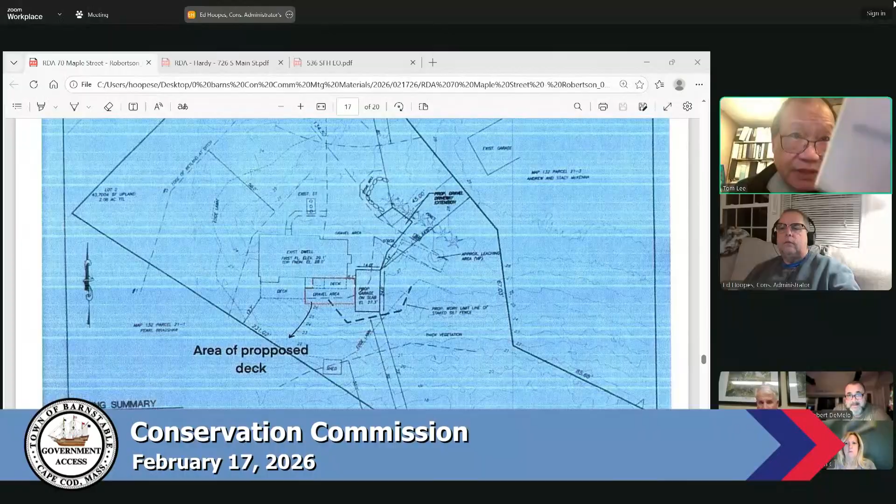I have to recognize Jeff first. Jeff? Conflicted on this application, Thomas. So Jeff is recusing himself from these applications. John? John McLaughlin from Groundworks.

Anyone representing the second RDA, for Donna Hardy? Ed, you don't see them, right? I'm going through again. I don't see anybody. Is there anybody here for Donna Hardy, 726 South Main Street? Hi, this is Masood with Groundworks. Carlos and I are here.

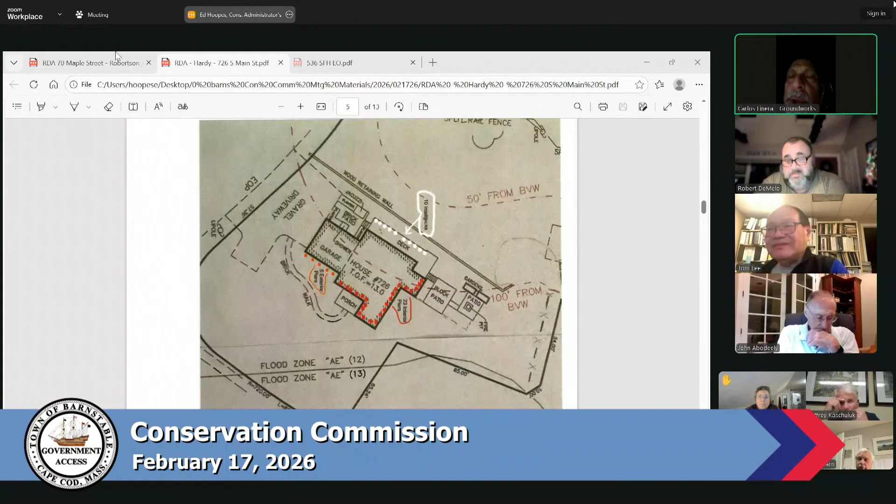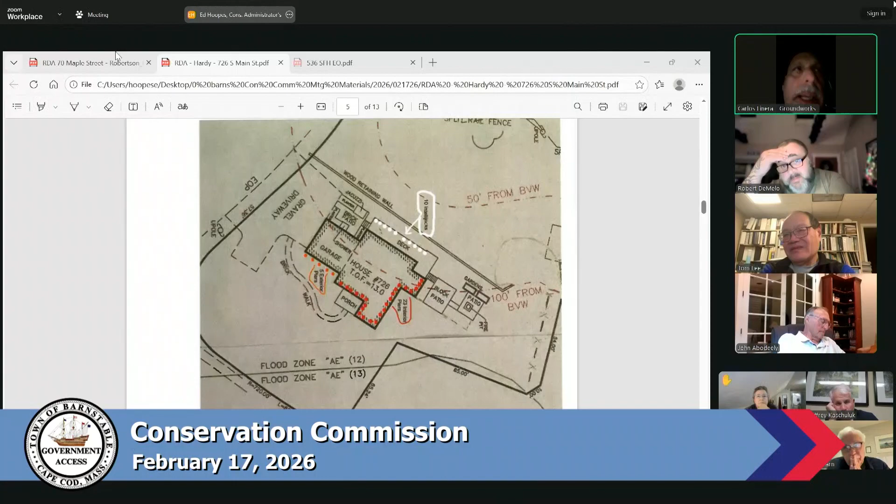Okay, but I do understand what you're saying, and honestly, at the end of the day, I feel terrible for the homeowner. Oh, so do I, it's horrible. This is a multi-million-dollar home, and we're providing her with a solution that we are standing behind 100%, not only because we've been doing it for decades, but because we strongly believe that it is a permanent solution. We have our engineering team that reviewed the whole project, we have one of the engineers here with us, and we strongly believe that this will solve their issue. This is not going to settle any further.

If this is what you guys do for a living, then by all means—I don't do this for a living, it's just that I've done similar projects, but I've always known the history. So yeah, just a little bit of info.

Yeah, just to add on, to address perhaps Rob's comment here: these IntelliJacks that were designed here, we actually have a load analysis calculation that goes along with this, which will break down how this load, all the weight above it, is transferred into these jacks down to the footing, assuming the worst case scenario for soil conditions, which is 1500 PSF. And so all of those calculations will be provided along with this.

Yeah, I'm fine with this. Don't forget, this is under the conservation's jurisdiction. We can only look at the impact, whether environmentally there is any problem or concern with it. Structurally, it's all up to the engineer to design the support structure to support this.

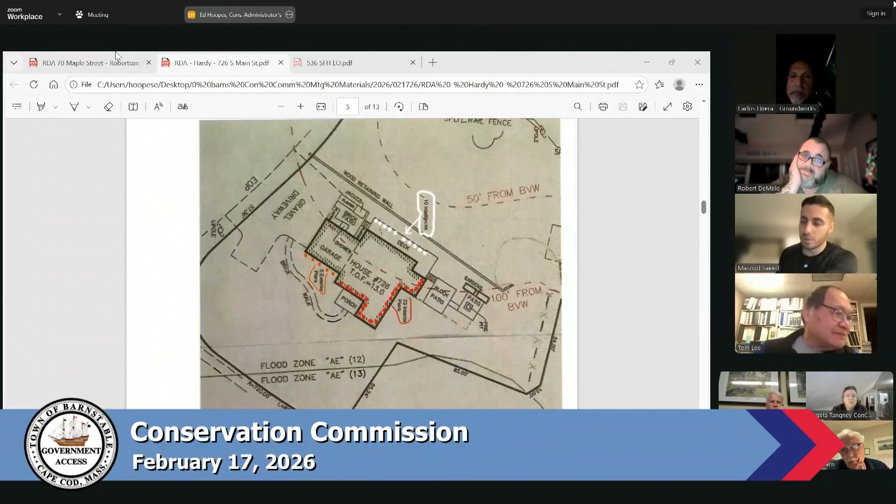But Angela, just a quick question. In the resource area off the deck side, there's a wood retaining wall. Could you at least tell us what condition it's in and how tall it is? And will this affect it, putting any pressure on that? Because that directly affects the resource area.

I apologize, what wood structure are you talking about? I'm not familiar with a retention wall. On the plan, there's a wood retaining wall, I believe, that goes across the back side where the deck is, where you're planning on putting the deck system. Do you know how tall it is and what condition it's in? The answer is I don't know.

Okay, and I'm being honest with you. I walked the entire perimeter of the property, and I went underneath the deck. I went in the crawl space. I did it all. I don't remember seeing a retention wall. I know that the property, after the deck ends, you have about 4 feet of flat area before the land goes down quite a bit into like a culvert or something.

Right, that's our resource. Yes, that's what we're trying to protect. So I want to make sure you were aware of that wood retaining wall that you are now going to put pressure on, that's all. No, I'm not against this RDA, but there are things here I think we need to consider as you work through this project. Thank you.

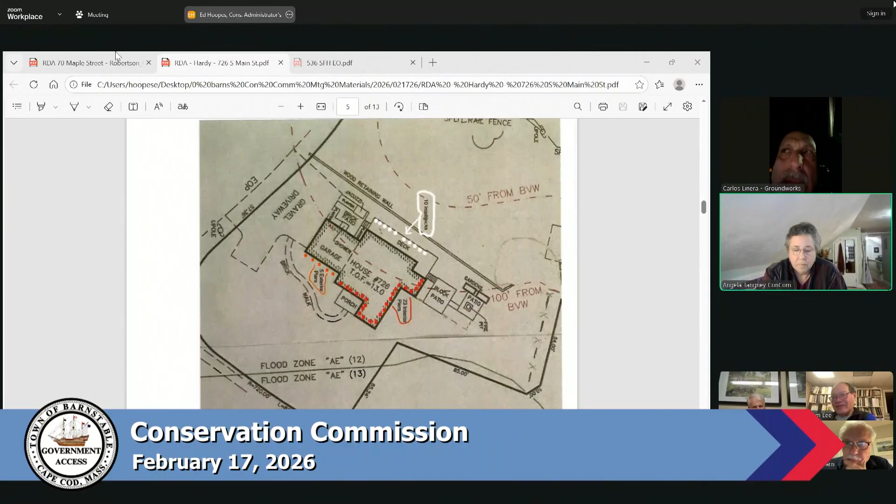We're going about 3 feet from the end of the deck inwards. That's where the main beam that supports the structure sits on 6 sonotubes. So we're going to put the jacks on that line, right where the beam for the deck is. We're not going to be doing any work beyond the deck itself. And that still gives us 4 or 5 feet before this retention wall that you're talking about, which I probably didn't see, ma'am, because of the snow.

Yeah, I understand, thank you. Okay, Chenoweth, any public comment on this one?

Seeing none, could I have a motion to approve this project as a negative determination? So moved. Second. Roll call. Abodeely, aye. DeMelo, aye. Hearn, aye. Lee, aye. Kaschuluk, aye. Sorry, Jeff recused himself. I'm sorry, my bad. Sampu, aye. And Tangney, aye. That's 6 of us, that's unanimous.

Thank you. Thank you, good luck. Thank you, guys, I appreciate it. Appreciate it, have a good one. Thank you, Masood, take care.

Yeah, bye-bye, see you later. See you, bye. Is there anyone representing the first one, Pamela Robertson, here? None? Let me go to the NOI and they will come back.

We have 2 NOIs this evening. The first one is Robert J. IV and Thomas P. Remmes, removal of a brick patio, paver patio, installation of a permeable paver patio and fire pit within 50 feet buffer at 536 Shootflying Hill Road, Centerville, as shown on the Assessor's Map 193, parcel 029. And Michael from Allen and Major Associates.

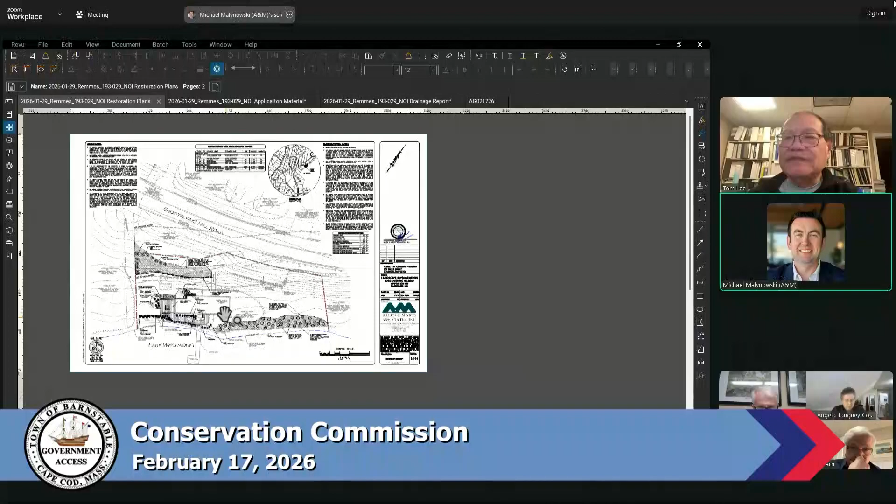As the NOI states, this is for the installation after the fact of a permeable brick paver patio for the existing house located at 536 Shootflying Hill Road. You can see the new paver installation here with the front door. As part of that installation, there was some additional landscaping installed in this location and along the existing retaining wall that sits along the lake's edge. As part of the mitigation, there was approximately 443 square feet of patio area that was constructed.

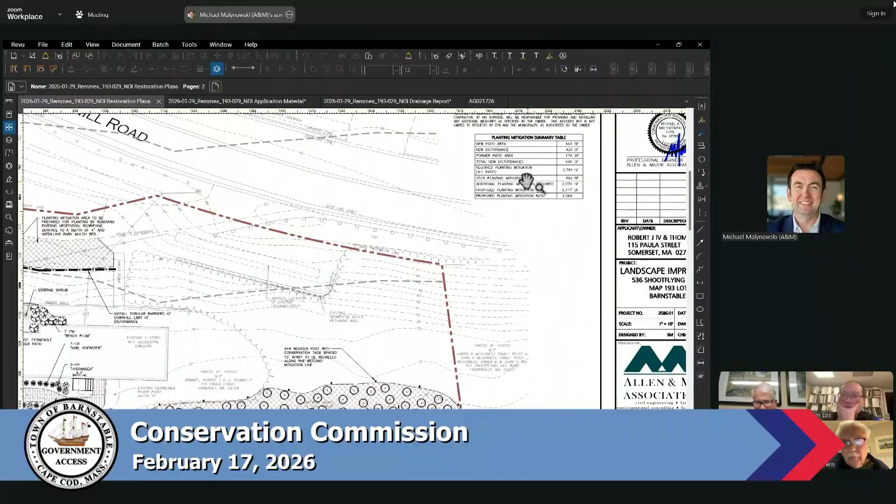There was 421 square feet of disturbance associated with that. We removed the existing 174 square feet of patios, which left 690 square feet of disturbance. Based on the town of Barnstable's requirement of a 4-to-1 mitigation ratio, this resulted in requiring 2,761 square feet of new planting. As part of the work done in the spring of 2025, there was 691 square feet of mitigation proposed.

And as part of this latest package is an additional 2,117 square feet of replication that is being provided.

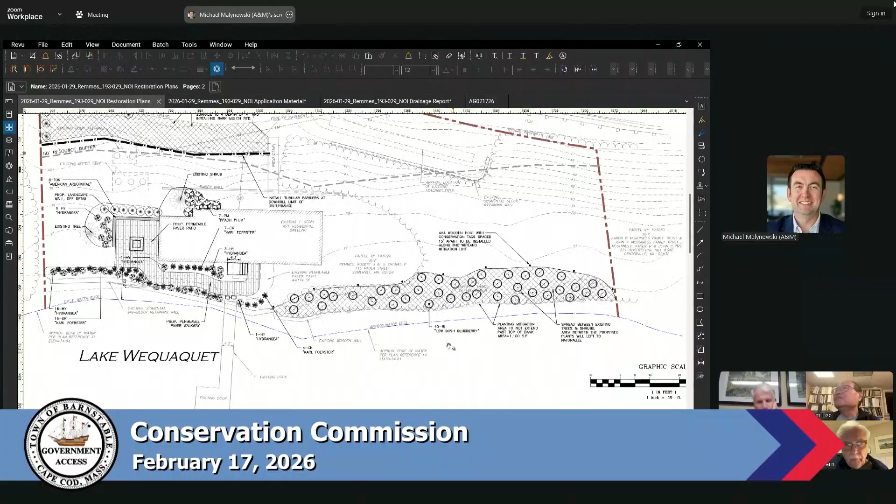The primary area of the replication is the installation of 40 low bush blueberries situated in this area. It's sort of natural scrub vegetation in that area, so the installation of the low bush will pose minimal impacts to the buffer. To supplement that, there is a large area being proposed to be replicated with hay-scented ferns along with arborvitaes in this area. Between those areas, we exceed the 4-to-1 ratio for the disturbance with the proposed paver installation.

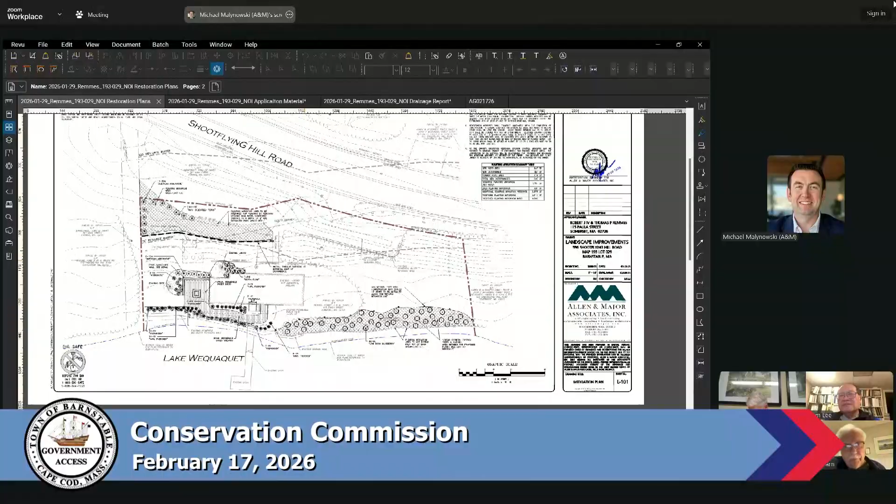This is the mitigation plan, and we had specific details that outlined the erosion control measures that were installed, the permeable paver construction, as well as the landscape wall and fire pit that was installed in that area.

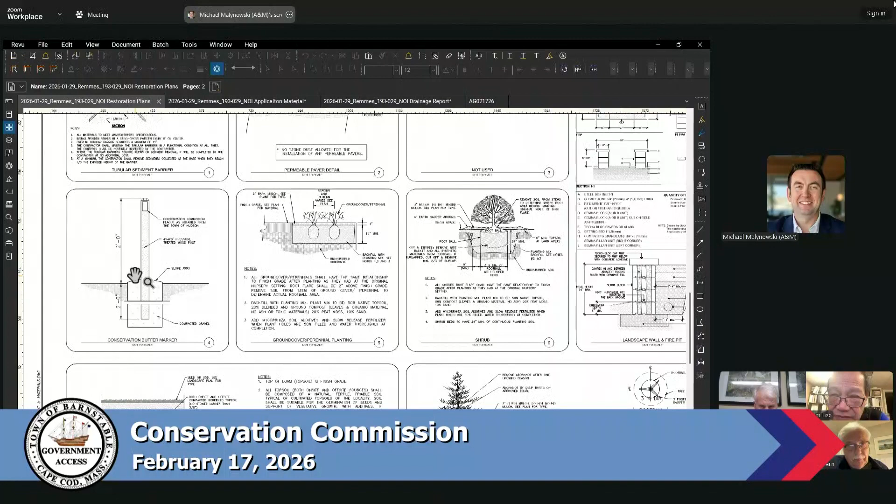As part of where the low bush blueberries are, we are providing the conservation buffer markers that the town has as one of their options. It's a 4x4 post with a conservation tag on it.

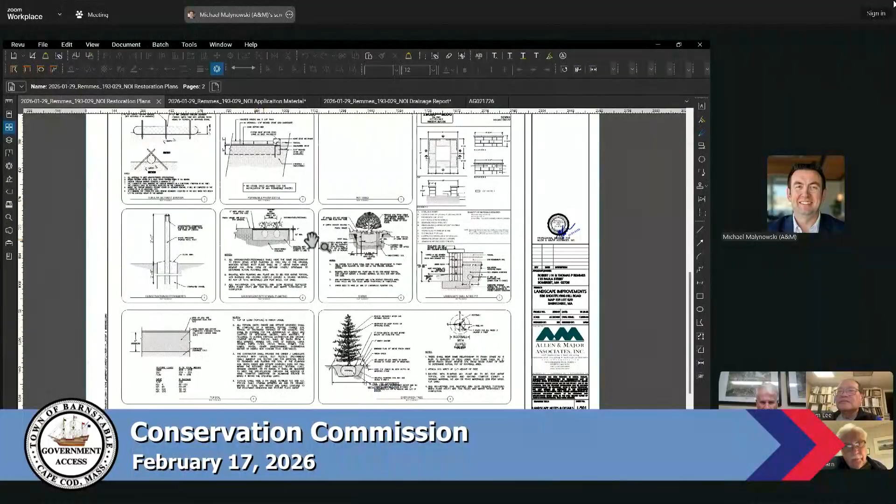We did provide, as part of the NOI package, a stormwater report, and based on the installation of the permeable pavers, we do have a net decrease in stormwater, both rate and volume, providing infiltration of stormwater in the area. Be happy to answer any questions that the commission may have.

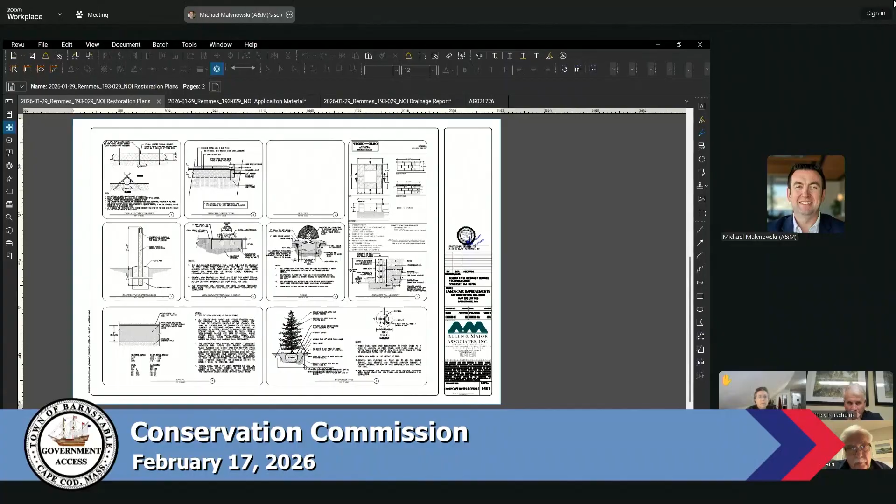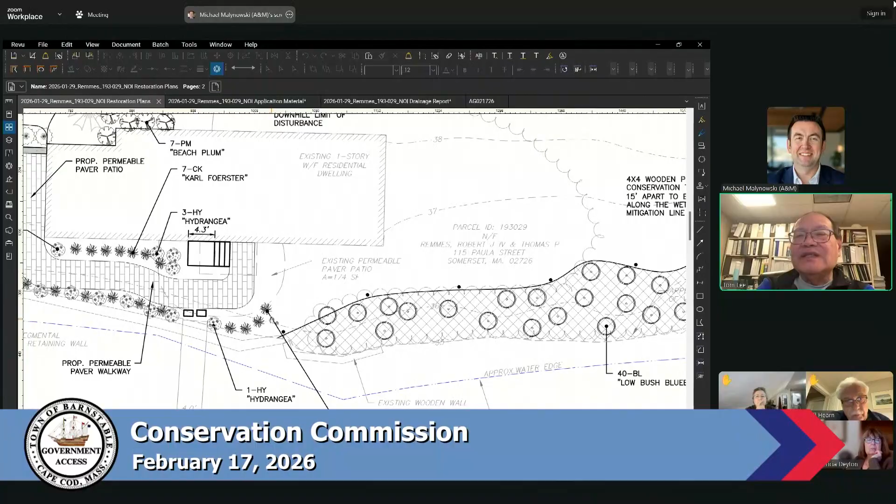First of all, can you go back to the engineering plan that you have. Yes, sir. I need some dimensions on the existing paver patio area. So the existing paver was 174 square feet. It's not just the square feet, I need the width and the length and all that stuff. Oh, okay, total area, I need dimensions.

Let's see, so you can submit a revised plan, I just want to mention it. Oh, okay, that we can do. Before I go to the commissioner, Ed, did you get a chance to look at the planting and the mitigation requirement?

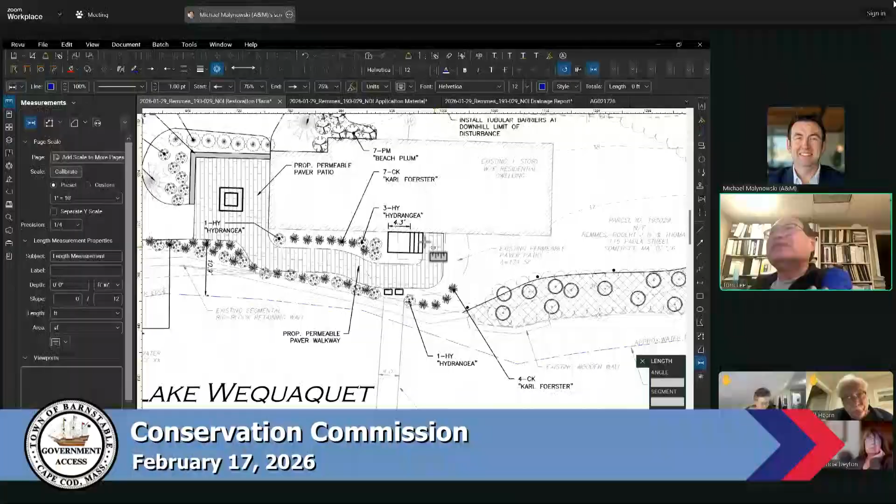Yeah, so I've got a few problems with the plan here. First of all, looking at the species and types of plants, most of these are not considered native plantings. Hydrangea is not something we would usually put into a mitigation area. I'm not sure about the Karl Foerster grass either, I'm not familiar with that variety to begin with.

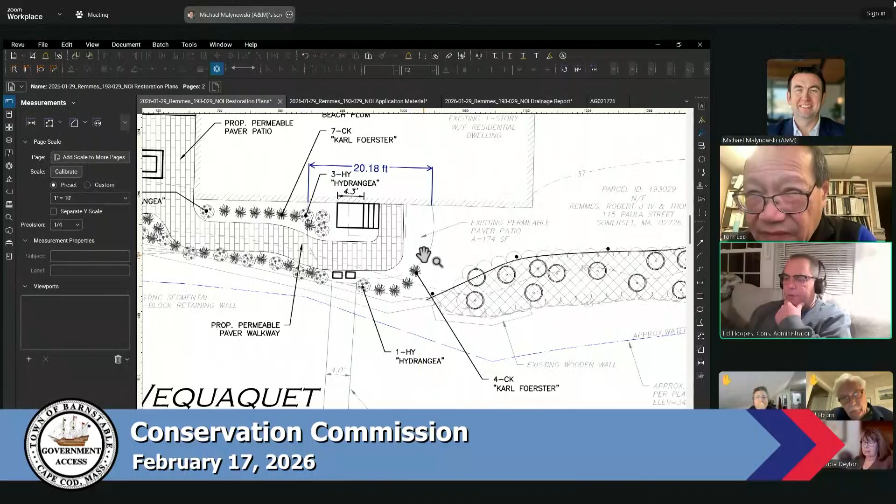I think the other issue is that whatever that northern area is in the 50 to 100 foot buffer, the hay scented fern, that might be 800 square feet, but I think that's in the wrong place. The mitigation needs to be put down in the 50 foot buffer.

I don't think a lot of what is being claimed as mitigation area for the 2025 planting mitigation is right. The area is good, I just don't think the plant variety is sufficient or of the right species and types.

The other thing is that I see a lot of spaces where the current conditions are showing a lot of mulch in those planting areas, and again, that's not something we would be looking to see. We would probably want some sort of a native seed mix interspersed throughout the rest of the plantings. I think there might be a little bit better options that you might consider for that area to the east, it's not the mitigation area that you were showing to the east of the property.

Low bush blueberry is an option you can certainly use, but I think it's being used a little overzealously, and maybe there could be some other varieties of plants mixed in there. Overall, I think a revised plan showing a much better distribution of the mitigation area is required, along with the types of mitigation planting, species, and varieties.

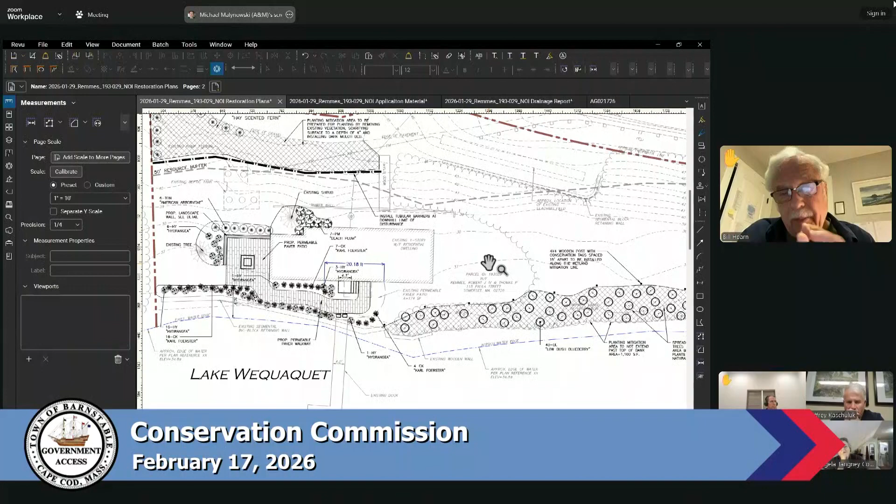I do believe that the mitigation zone on the left side of the house, to the left of the patio, I would think you'd want to stack a lot of your mitigation along the waterfront over there. Hey Bill, this is Tom Remmes.

I'm the owner of the property with my brother, Robert Remmes. I just wanted to explain some of the reasoning for the locations of the mitigation. As you're aware from being on the property this afternoon, our driveway is right at the very top of the property, and it slopes down toward the lake. The house is just under 1,000 square feet. We have minimal flat portions; everything else is kind of ramped going up.

So we were trying to do some of the mitigation from the top of the driveway to the bottom of that hill, essentially, to prevent any runoff. It would create a buffer to wash out anything coming from the driveway or from Shootflying Hill Road before it hits the lake, similar to what mitigation is supposed to do: protect the wetlands areas.

And then on the other side, as you were saying, we do have that 2-foot buffer zone where we have a couple of trees planted right on the coastline, as well as some pricker bushes and holly bushes in a strip, and then a little open yard area. We have a small retaining wall that then drastically slopes up towards Shootflying Hill Road. That section is where we have a holding tank for our septic, which with the new sewer line going in will be removed, and we're going to be tied into the gravity feed system. So that's kind of a phase 2, if need be. We were going to plant some mitigation up there as well.

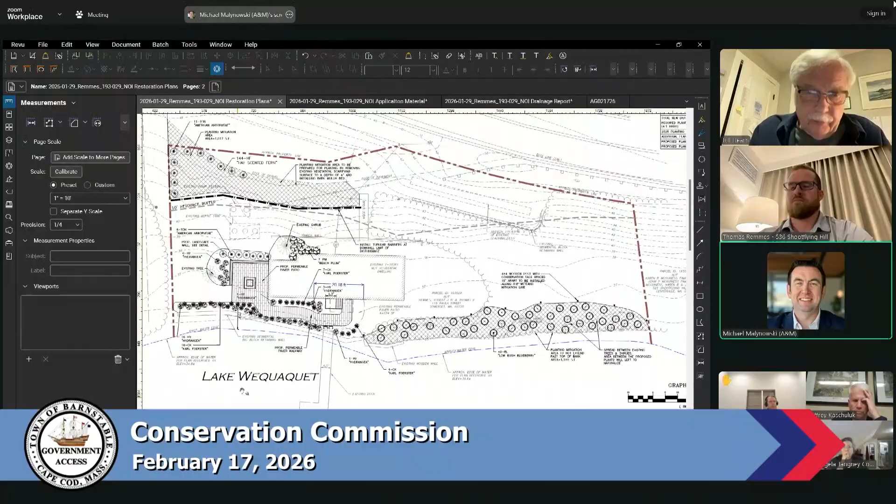To go back to your comment about the pavers - they're actually permeable, which is a better solution than flagstone. If you put in flagstone, you'd need a bedding material that makes the area impervious. The stone pavers, although they look smooth, are designed to take on much more water than a field stone or blue slate walkway. So permeable pavers are actually the preferred alternative for stormwater in this situation.

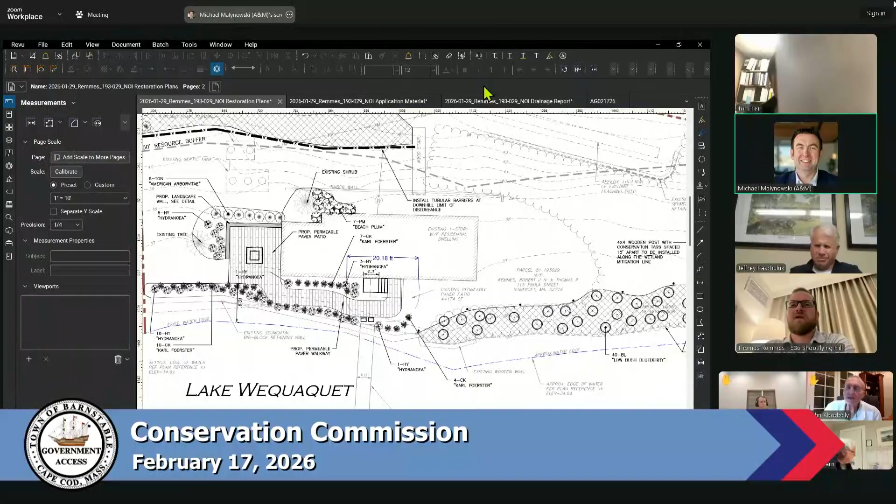How much time do you think you need? Would it be possible to get some written comments from Mr. Hoopes? From Ed? Yeah, all of these comments are great, but this is the first time we're hearing that there was concern by staff. We haven't received any written comment on the plans that were submitted, so that would be helpful if we could get that.

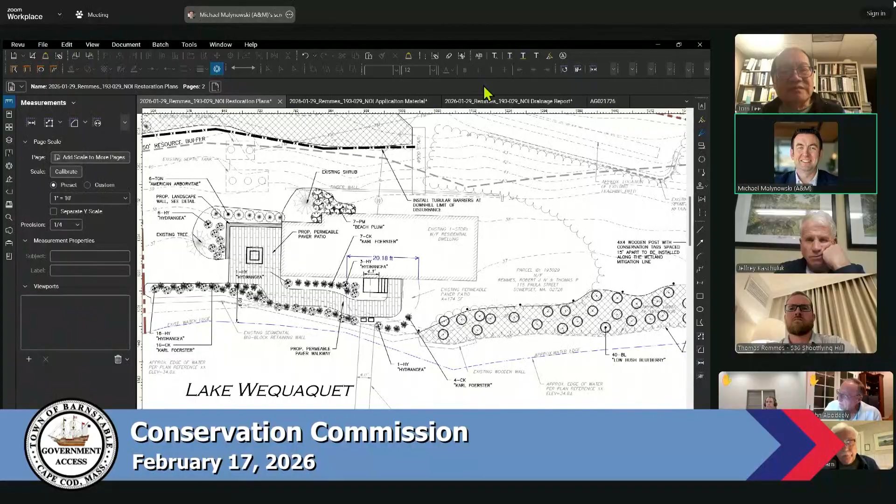Ed needs to respond to that too, Tom. Ed can send you an email, or you can talk to Ed, because right now, looking at the agenda itself, in March we have 3 hearings, the 3rd, the 17th, and the 31st. I think the 3rd is too quick. You may need more time. It may be the 17th or the 31st.

So Mike Malynowski, if you could send me an email tomorrow, I will try to spell out some of the major points that the commissioners are going to be looking for. Get back to you as quickly as I can. All right, sounds good, thank you, sir. Is March 17th enough time? I think that is doable for us. Okay, if not, you can always just let us know, and then we can move it to the 31st.

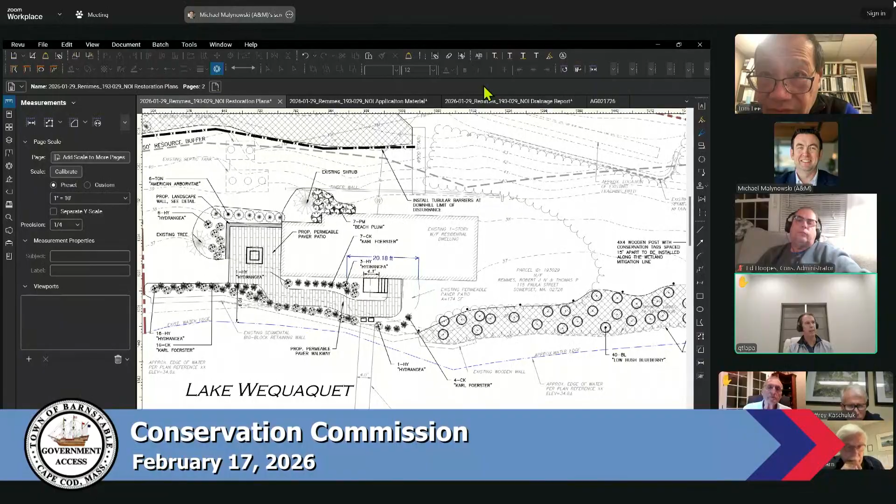Hi everyone, my name is Guy Talapa. I'm the homeowner at 547 Shootflying Hill Road. If you're looking at the plan, it's basically right to the left of the patio. Along with a few other houses, we have a right-of-way deeded path about 10 feet wide that I do not believe is really acknowledged on this plan, or maybe it is over there. Tom and Robert are great neighbors. We have really no exception to the patio. The two kind of things we are taking exception with, and I might have a third one now that I'm seeing these giant arborvitaes at the top of the screen.

The 7 or so arborvitaes that are in front of the patio, we totally get the screening intent there, you want some shelter from the road. But from our front yard, we're already seeing the tops of those, and they grow like 3 to 5 feet a year, topping out at 60 feet tall. So I feel like over time our view is going to get really obstructed. And this is the first time I'm seeing the 11 arborvitaes at the top of the driveway. If those go in with the ones down at the road, our entire view of the lake is gone. I apologize for the late notice.

I sent Kimberly an email, we got notified kind of late, I feel, on this hearing. Back to the 10-foot deeded path, the low shrubs, I think the intent of the path is to allow us access to the lake. I sent Kimberly some photos, and I think everyone's seen it, but the little band running along the left side right against the water kind of cuts across there. So it's not like we're obstructed from accessing the lake, but it feels like a bit of a land grab with the planting going over that area.

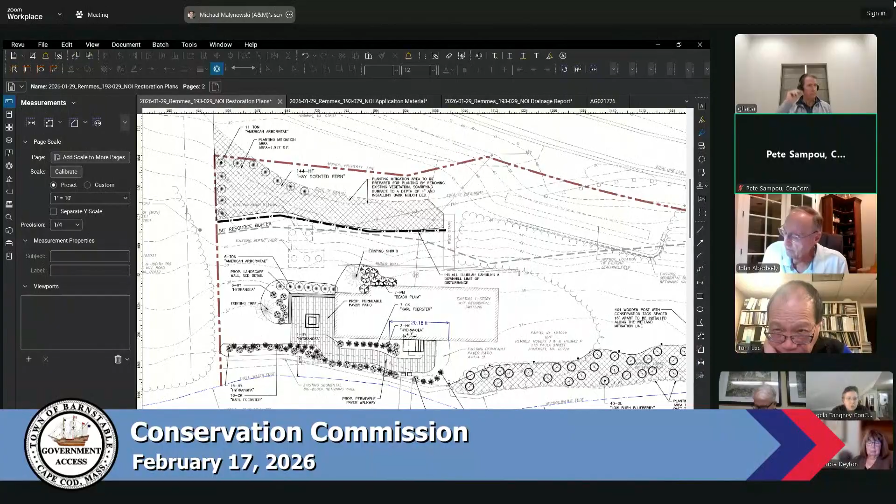Thank you. Michael, send an email to Ed so that you guys can talk about the type of mitigation planting and the location of it. We will do that, sir. Thank you, everyone.

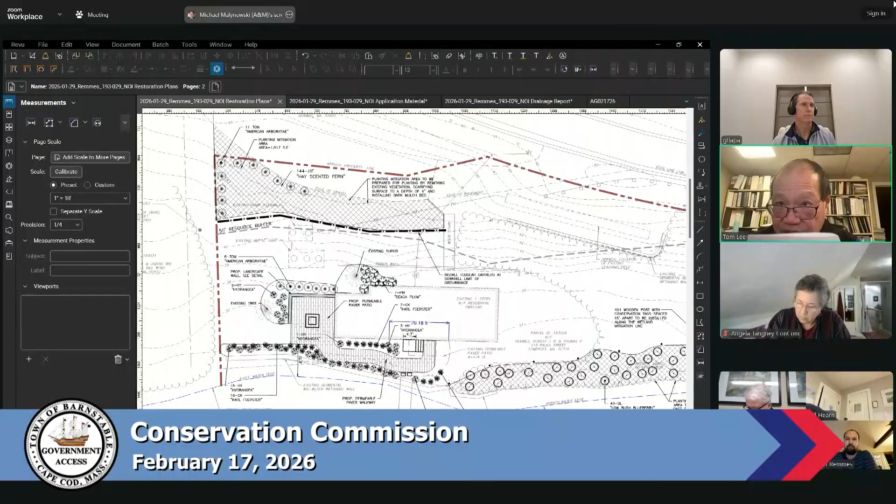Thank you. The next NOI is Gregory J. and Julianne P. Pinto, trustee, JDC Ocean Avenue Realty Trust, proposed management of invasive Phragmites at 47, 57, and 63 Ocean Avenue, Centerville, as shown on Assessors Map 226, parcels 035, 036, and 149. Good evening, John O'Day from Sullivan Engineering Consulting, representing the applicants. I will pull this plan up for you.

We have been working with the Pintos, who are the owners of 63 Ocean Avenue and the majority of the marshlands at the end of this creek off of the Centerville River. We worked with them on a bank restoration that came before the commission, and as part of that project there was a bit of Phragmites control right along the immediate bottom of their bank in these areas. They were very happy with those efforts, and they are concerned about whether the Phragmites will continue to proliferate in other areas of the marsh.

So they started this venture where they're hoping to continue to expand on the areas they're controlling. They've also been in touch with their neighbors heading south at numbers 57 and 47 Ocean Avenue, who also have smaller areas of marsh and Phragmites, but they'd like to begin working their way that way. So this has been filed as an ecological restoration. The scope of the project is strictly for Phragmites control.

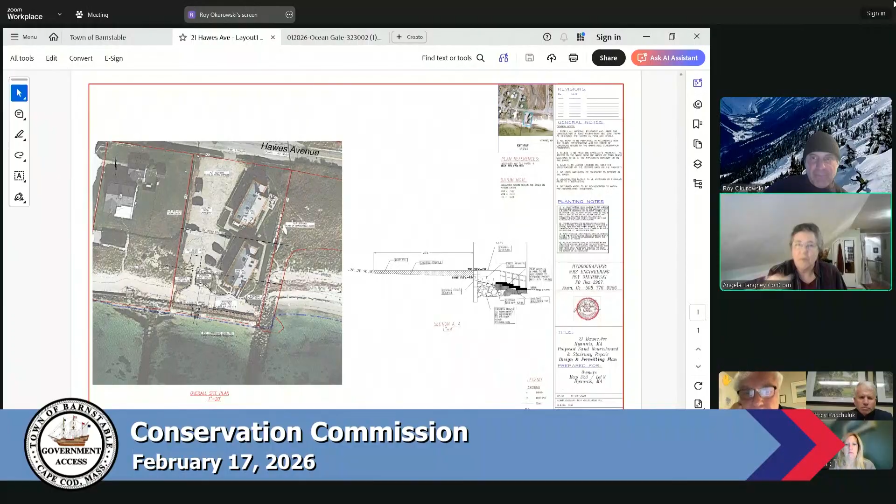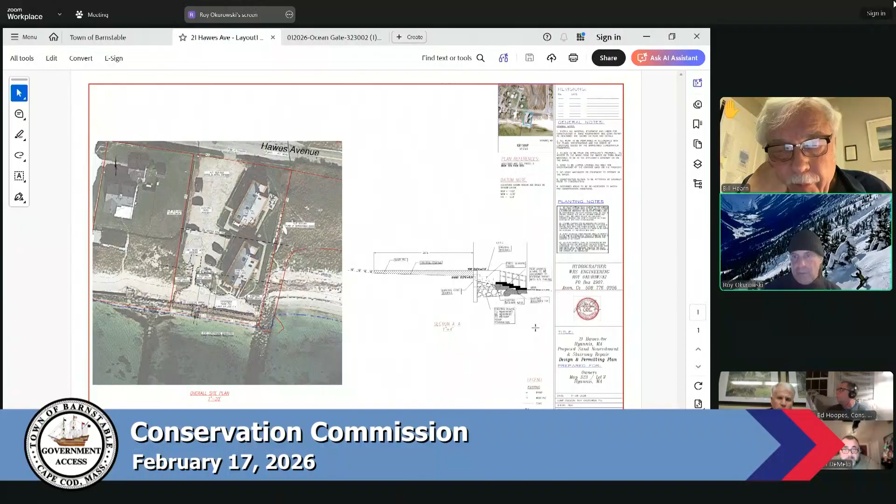Thank you, Bill. The diagram says the seawall is 5.5 feet high. Is that right? Yeah, the top of the seawall is 7. The top of the existing wall is 7. The elevation of the sand varies... get a zoom in. It says, I'll zoom in... .5 is like where a lot of the stairway comes out, and that's the low point in the sand.

So we're putting approximately 6 inches to 1.5 feet of sand in behind the wall. It seems to me like having a higher seawall would help. Have you considered that? So they didn't want to do that. When I proposed it to them, I said you can raise the wall and the groin around the whole property, and because it's in the same footprint, it's a fairly easy thing to license and permit. They didn't want to go that route at this point. Cost prohibitive, and plus that seawall on the side is on town property, not theirs.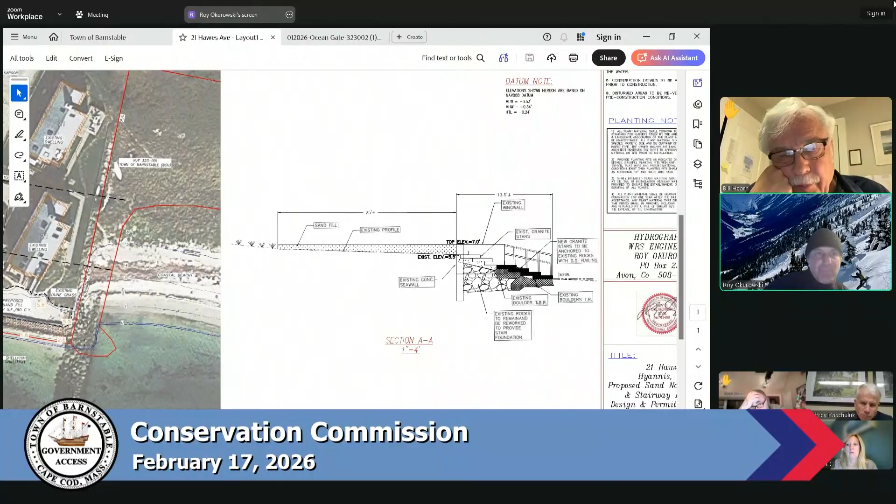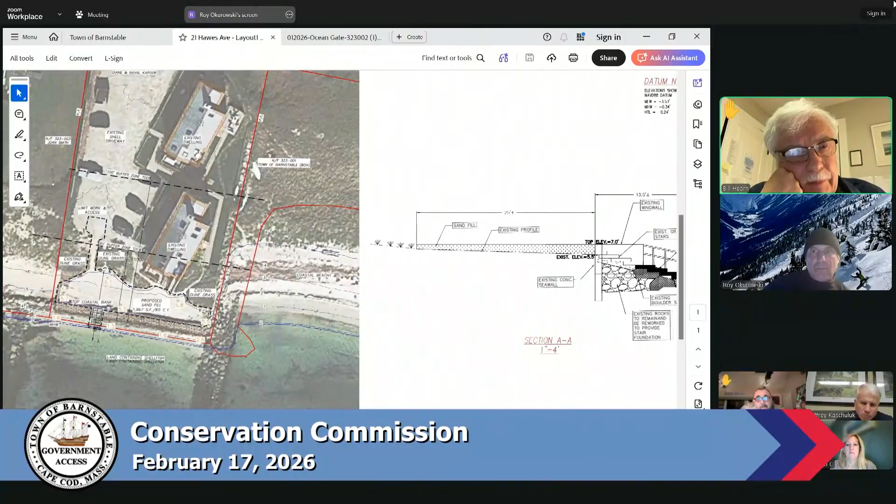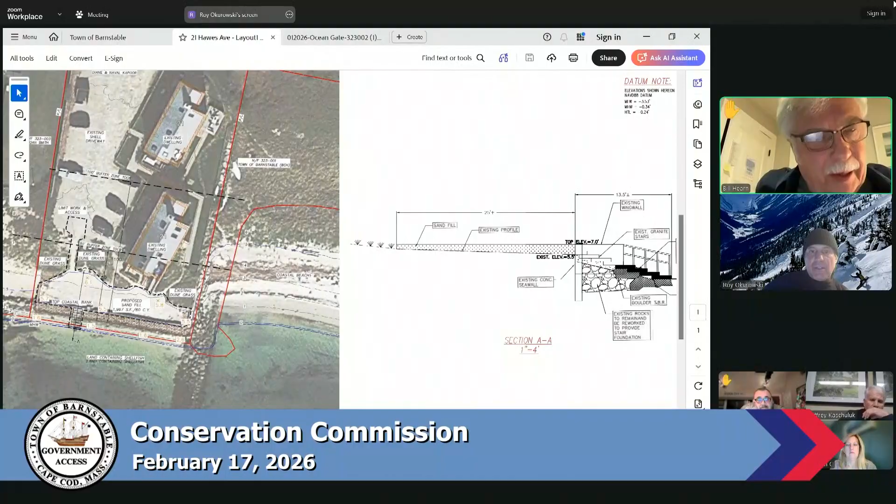It just, as Angela is suggesting, seems like you're going to be dumping sand, it's going to wash in, and you're hoping we can just do that in perpetuity. There's something that doesn't feel right about allowing it in perpetuity. I would think jacking up the wall would be better, but that's... well, if you jack up one wall, you have to jack up all of them, because you'd be forcing water to other properties. And you're talking probably a $5 to $10 million project for the entire facility.

I guess I'm okay with the idea of dumping some sand, but I feel uncomfortable with an in-perpetuity clause. And we're fine with that. That's just a request. Okay, Rob.

My question is, when you do the sand, are you going to be flat with the top of the wall, at the same elevation, or would you attempt to build a large berm and plant beach grass on it? So historically, beach grass won't survive here because the waves come right across it. We looked at that in all the properties that do have more sand there, and the vegetation fringe, as shown, is going to go back to that no matter what you do. We're going to lose this sand within 3 years, and everything that's planted on it.

To put a dune there is a viable alternative, but I think it's going to get washed away. But would it slow the process down? No. I mean, you could put more sand in. We could double the amount of sand and plant it, and then it would last twice as long.

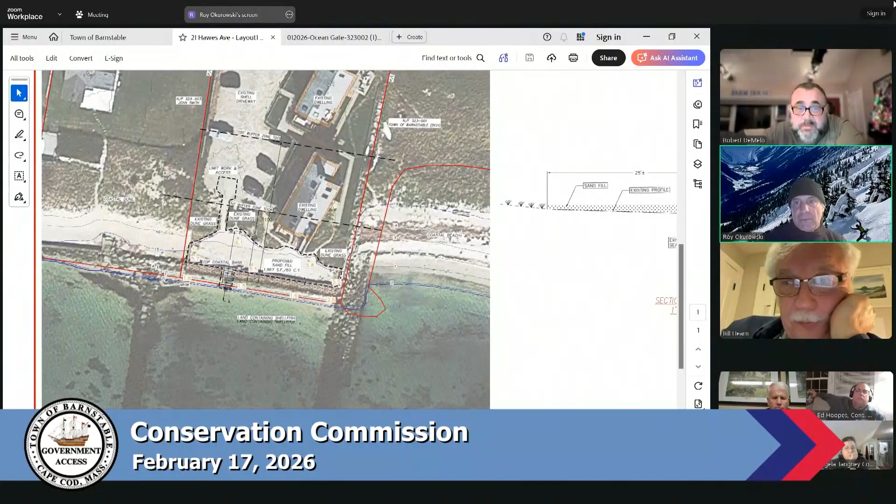Thank you. Pete? Yeah, rising sea levels, increasing severity of storms also associated with climate change. Keep it simple, they're asking for sand. Sure, let's get along. Let's get on with this.

I agree, it's a quick fix and a Band-Aid, but if we all agree on it, I understand this is what's being asked and what we can do. I just agree with Angela and Pete on that. It ain't the long-term fix we'd like to see, but it's better than what's there, and it's the right thing to do. So I'm okay with it.

I agree with Bill on the perpetuity issue, but you come back in 3 years, ask for an extension, it's going to give you 6 years. In the meantime, during those 3 years, if you need to add more sand, I think you can do that under the existing order conditions.

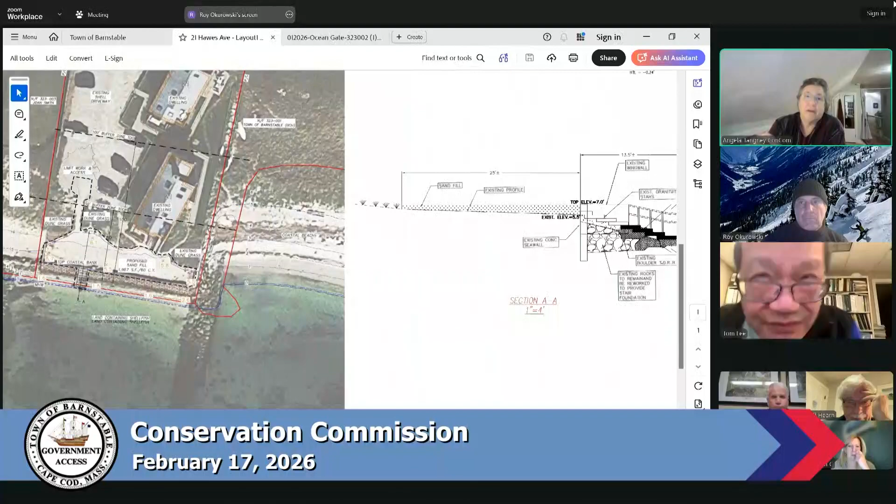As far as the stairs go, we've got to make them safer because it's a slippery mess there and they're uneven now, going to nowhere at high tide. It's probably not a negative from an environmental point of view. It is not. So I'm okay with that too, Angela.

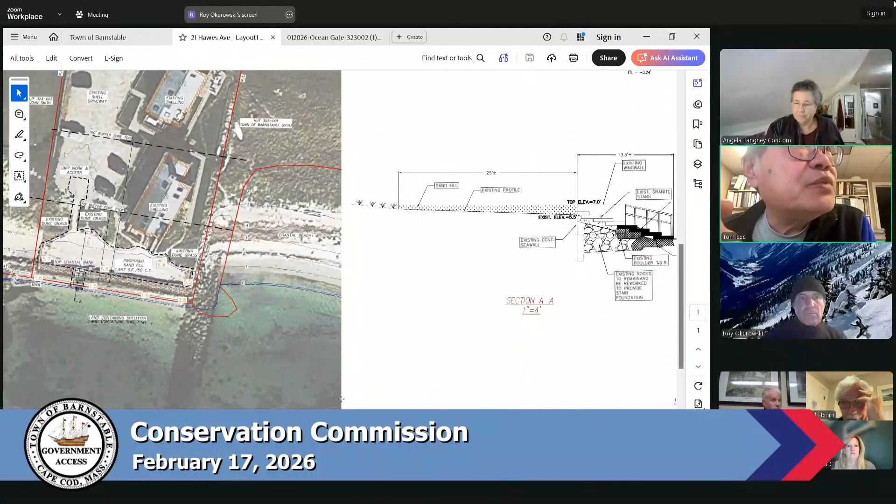So let me say, under the wetland, under the Division of Fishery and Wildlife, the NHESP letter: under the Wetland Protection Act, the division has determined that this project will not adversely affect the actual resource area habitat of state-listed rare wildlife. And under the MESA, the division has determined that this project will not result in a prohibited take of a state-listed rare species.

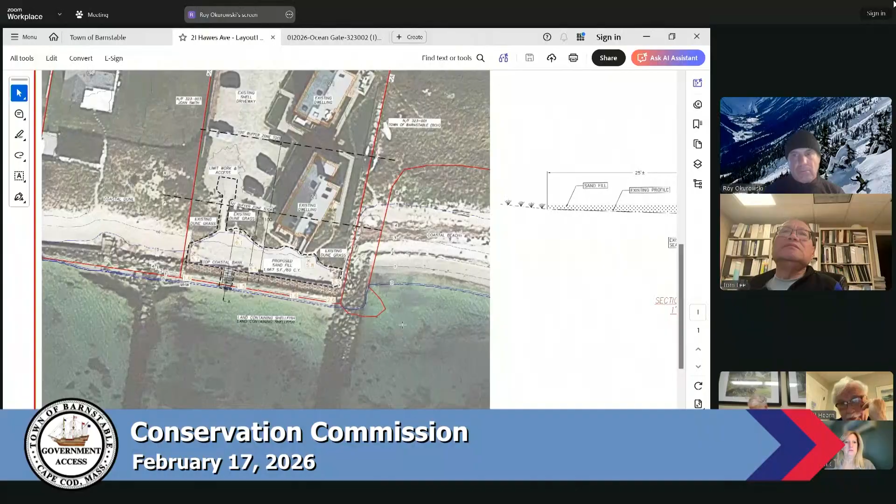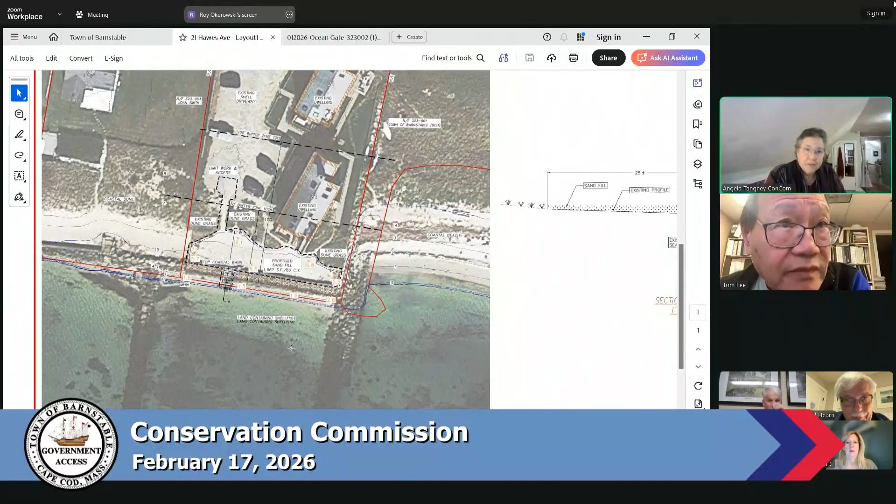Channel 18, any public comment on this one? Seeing none. Could I have a motion to approve this project as submitted? So moved. Second. Roll call: Abadili, aye. DeMello, aye. Hearn, aye. Lee, aye. Kaschuluk, aye. Sampou, aye. And Tangney, aye. That's unanimous, Mr. Chair.

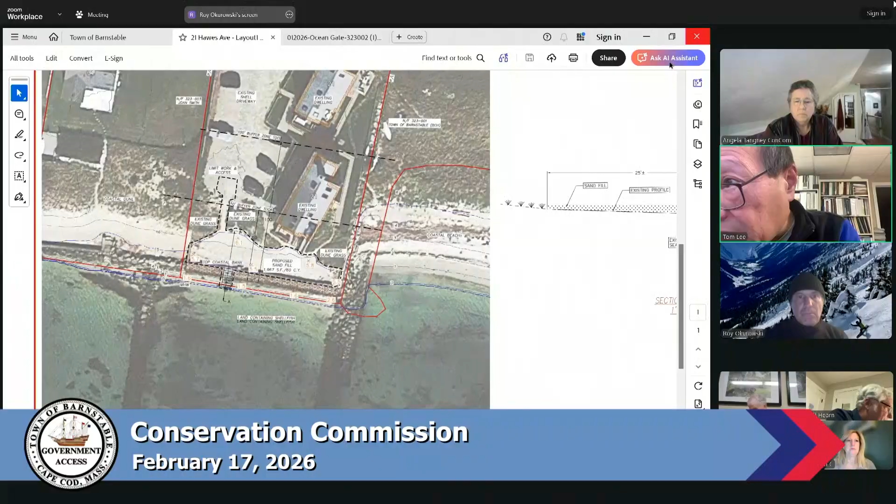Thank you. Good luck. Ed, anyone representing Pamela Robertson here under the RDA, 70 Maple Street? I haven't seen anybody. Again, is anybody here from PLJ Carpentry? I called and spoke to someone there and she was going to try and get on the meeting. I sent her the Zoom link but I have not seen her yet.

I think this is a relatively straightforward project. Do you think we can approve this without an applicant? I would say you could probably do that. That's up to you, but it seems like a very straightforward, simplistic project. It's buffer zone only. So many times Tom would simply say, if you don't want to talk about it, commission can ask questions, so maybe there are questions of some kind.

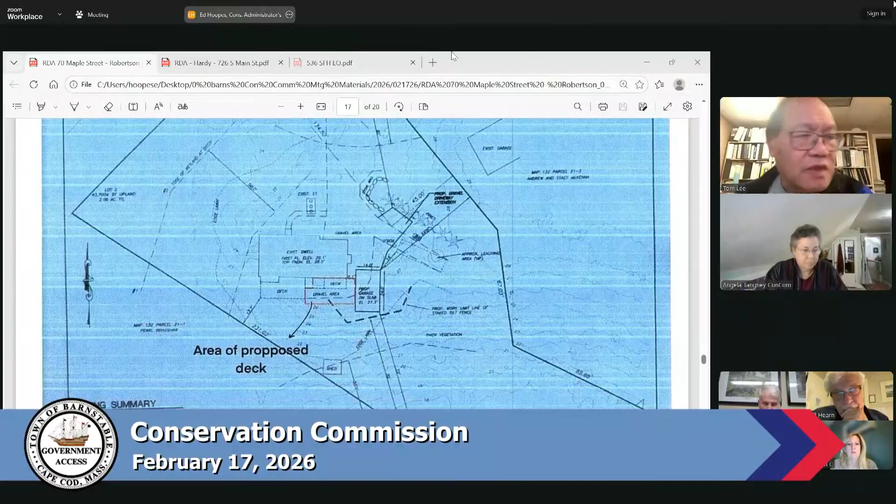Any question from the commissioners? Mine was just, it's already a disturbed area there, so I'm good with this. Channel 18, any public comment on this one? Seeing none. Could I have a motion to approve this project as a negative determination?

Second. Roll call: Abadili, aye. DeMello, aye. Hearn, aye. Lee, aye. Kaschuluk, aye. Sampou, aye. And Tangney, aye. That's unanimous for negative determination, Mr. Chair.